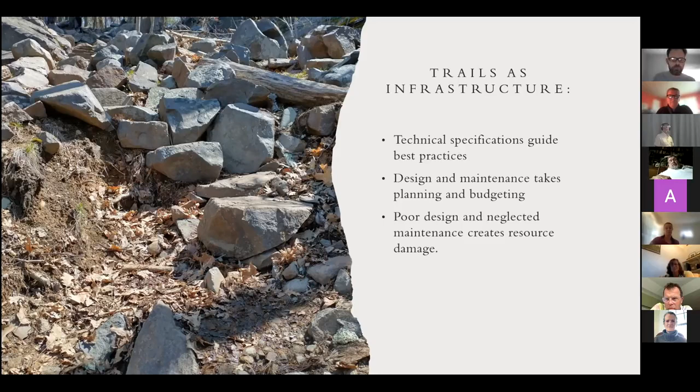But anyway, I'll move on to a discussion of what we'll cover in this presentation. I'll introduce the group to the concept of trail classification, just to drive home the point that there's a spectrum of trails and trail management decisions. And so not every trail needs the same treatment as the trail up to Nevada Falls at Yosemite, or maybe a popular trail up Mount Washington or Mount Monadnock.

The bulk of this presentation will really be about those sort of technical specifications. That's about how a trail interacts with the landscape, and that's about just some of the numbers and terminology that we use in this field to specify what we aim to do and the problems that we face. And we'll talk a little bit about construction and maintenance tasks. For this group, we'll go into specifics about what we're going to do Sunday and next week at Wright Woods.

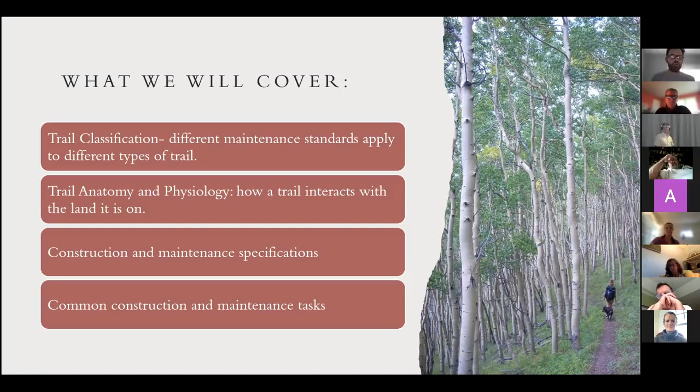So some objectives for this presentation. We'll talk about sustainable design principles. I hope that you'll leave this understanding what that means and how to identify and plan sustainable trails. And I hope that this knowledge is applicable. I hope that this isn't just theoretical. I hope that in your work throughout your communities, I give you at least something to think about and then further to use.

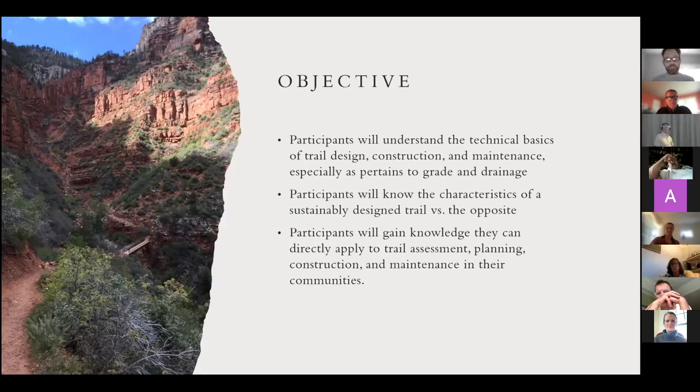So about trail classification, to get us started, this trail classification is U.S. Forest Service jargon, going from trail classification 1 to trail classification 5. Trail classification 5 would be like the bike path along the Charles River, for example. It's a trail, but it's a paved trail that is ready to accept a whole lot of use in a very front country environment.

Whereas, on the other end of the spectrum would be wilderness trails that require very little maintenance. And in fact, a light hand and little maintenance is part of the experience we would aim to facilitate on sort of a class 1 type trail.

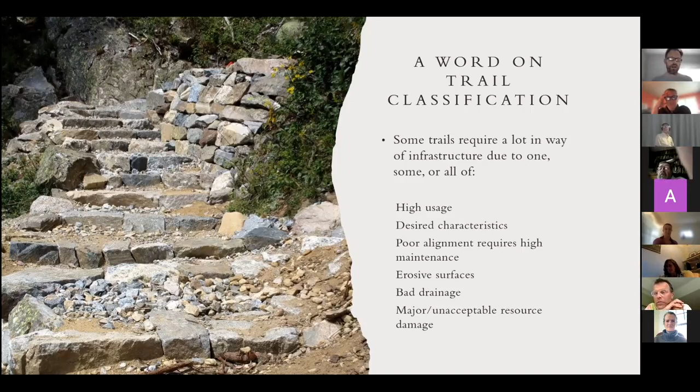But also the erosion was incredibly severe. The drainage was poor. So all of these criteria led us to management decisions to really have sort of a heavy hand. This was a very ambitious project. And so that's the spectrum of prescriptions that we could have in a trail work situation, and just to give you a sense of that spectrum, that it's not one size fits all.

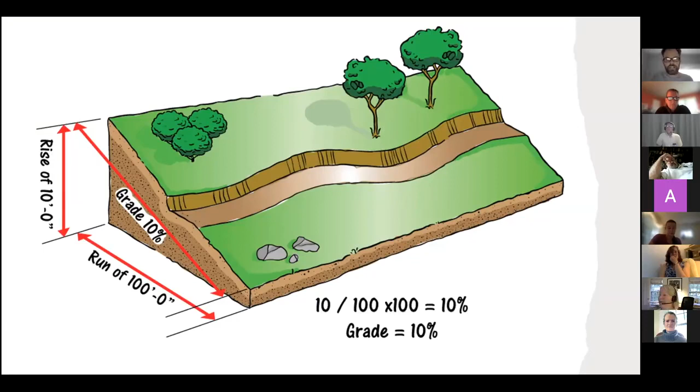So just so we know the terminology, this is how we calculate grade. It's very simply rise over run. Be advised not to get confused between degrees and percentage. People sometimes use them interchangeably, sometimes use them wrong. I try to only speak in terms of percentage, just to be clear. And so a 10% grade would be a rise of 10 feet over a run of 100 feet. In this diagram, that's the grade of the side slope. And then you're looking at a running grade of the trail that traverses the side slope moderately, scarcely gains any grade, probably not more than 2 to 3% if we're just estimating. And we do see at least one nice little drainage dip, grade reversal, in this illustration.

So here's the half rule. The half rule is just a rule of thumb. There has been in the last 10, 15 years some actual science about the relationship of running grade to the grade of the side slope. But this half rule has been around for a long time as a rule of thumb, and I think it's a good rule of thumb. It's simply that if the grade of the trail exceeds half the grade of the side slope it's traversing, then water will get on the trail and it won't get off. Whereas if we stay within 1/2 or less, we're setting ourselves up for the water to drain off the trail.

Some of the actual research that I've seen suggests it depends on the soil, it depends on the trail network, but especially in erosive soils, the half rule might not be enough in certain circumstances. And in certain circumstances, it's more than ample. But the key of the half rule to me, the eye-opening thing I've had in recent years, is that the half rule applies when your trail is only on a 10% slope. For me, it's instinctive to say, oh, this trail is really steep, so it must be bad. But if it's going over ground that is not steep, we have to take that into consideration. The trail has to be even less steep.

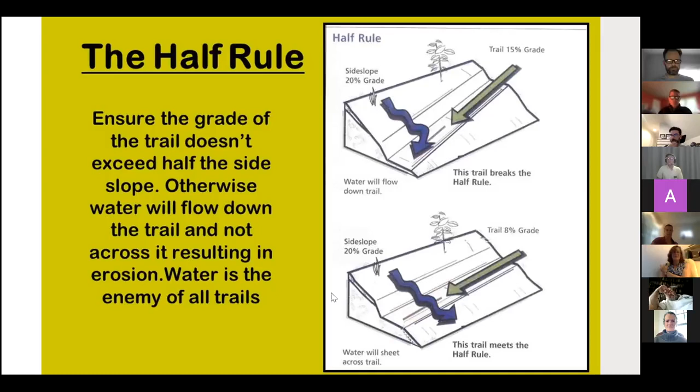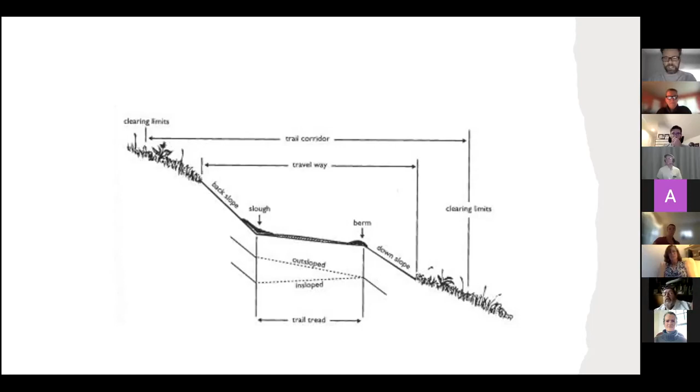The steeper the running grade, the steeper the outslope should be, which makes intuitive sense to me. Anyway, I don't want to get too bogged down in the technical stuff. There will be more slides and we'll continue to talk about this. So here's another slide that would demonstrate a 5% outslope.

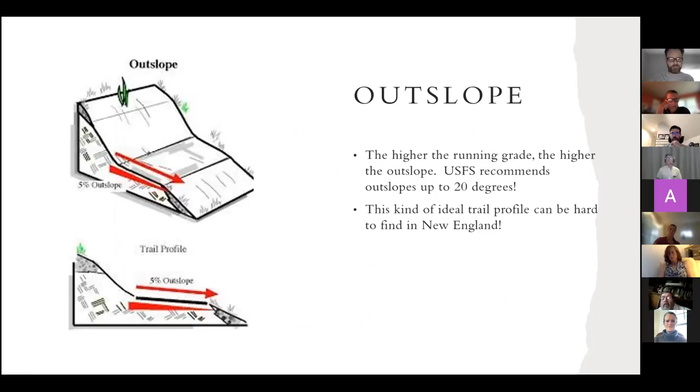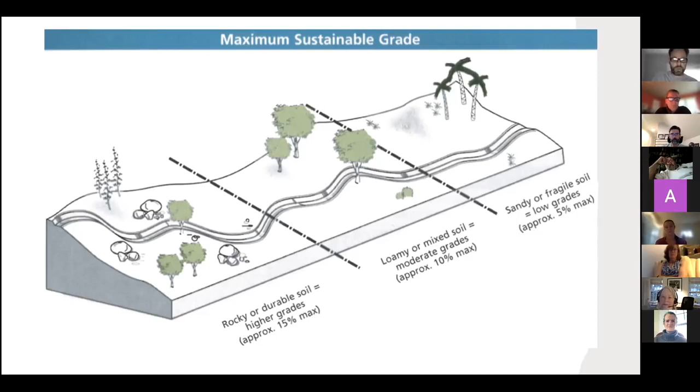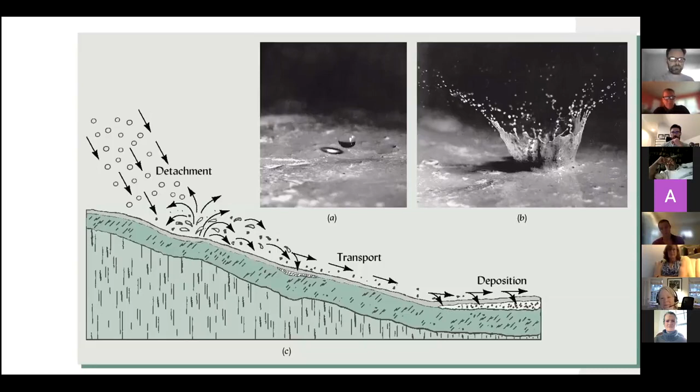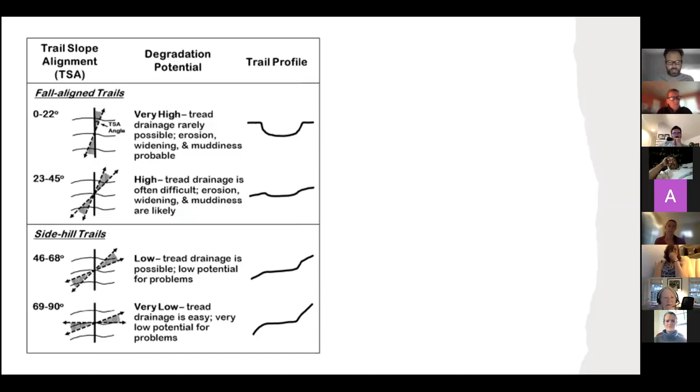Again, this is just the same principles over and over again. I do like the trail profile visual. I think it's helpful. And you can see the relationship of the running grade and the side slope grade to erosion problems. And you can see how that is cyclical. In the top fall line aligned trails, it only gets worse. And that's why it's unsustainable.

So here's a beautiful, this is actually that same Mount Baldy trail, just much lower in Bozeman, going up the M, if you've been. And so here we would observe a fairly erosion resistant soil, although it is a little dusty and sandy. In rainy conditions, it becomes like clay and slippery. So I think it is that kind of mixture, I would just guess.

But I like this slide for a couple of reasons. It traverses the side slope. And also there's a really clear example of a drainage, a grade reversal right here. They can be really subtle, especially when you have such an even soil and earth to work with. There's no rocks and roots there, which is crazy to us.

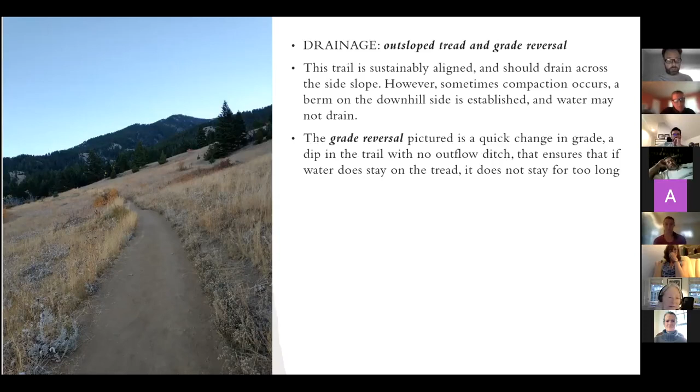So here's a picture from Grand Teton. This is demonstrating earthen berm drainage ditches or water bars. And this just demonstrates that this trail was clearly, to me, designed with some intention. Because it makes an effort to go across the side slope, but of course, when it comes and turns and switches back, it has to cross the fall line. And as it approaches and then crosses the fall line, the amount of drainage ditches increases.

Here in Teton, again, this up here is an excellent erosion resistant soil type. And we don't even need rock hardening or log hardening on the downhill side. Even when it gets steep, we can just rely on this soil to create earthen berms to divert the water off the trail. Really, this picture to me shows that as the trail gets steeper, the drainages get more frequent.

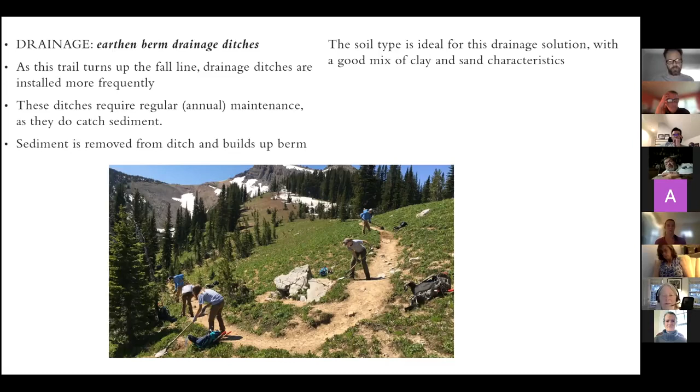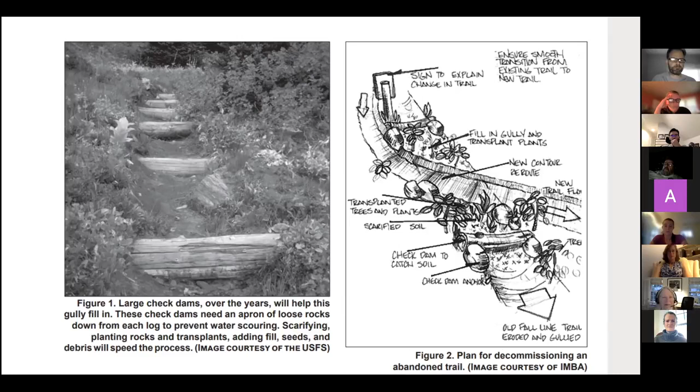I think at Wright Woods we might actually start finding some good soil sooner than in this particular photo, but I have gone back and visited this trail, and just the foot traffic alone kind of does burn out some of that organic material and leave you with a better tread than if you had tried to excavate down to that mineral soil, or worse, gone through the labor of trying to import it from somewhere else.

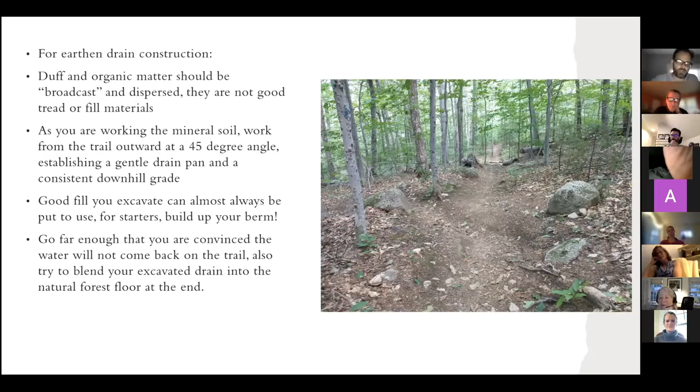Also, skiers need a little bit more maneuverability to make turns and whatnot, so we tend to go a little bit wider for the skier, as well as a horse has a wider profile. Out west, we account for pack stock being even wider. But generally, I talk about a 4x8 sheet of plywood. You should be able to hold a 4x8 sheet of plywood and have it not touch anything as you walk down a cleared corridor.

But you don't want that to be obvious. And that's because when you remove a branch, so if the plywood hits the branch, you grab the branch and then you follow it to wherever it begins, and you remove it wherever it begins. So you're not cutting it off strictly at the 4 feet, and you're not creating an artificial looking rectangle in the forest. You're tracing each piece of vegetation back to either the ground, cutting it flush, if it's a small tree or shrubbery, or if it's a branch, back to the tree trunk, or in some cases a prominent fork.

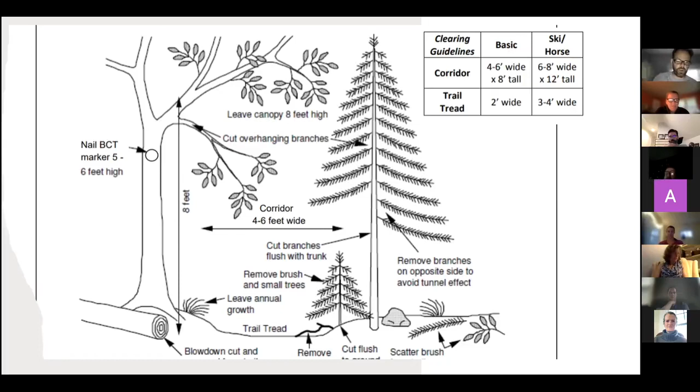And this is for small trees that are pictured here. Obviously, we wouldn't want to unnecessarily remove any mature trees. As trees get mature, their branches are up higher, so generally they clear the corridor a little bit easier. And so these pictures demonstrate what I'm talking about, that these branches that come into the corridor are removed at the base, pictured as a saw cut through where the branch meets the trunk.

And then as we are brushing out, as we're clearing the corridor, we'll take that vegetation, those small trees, and it will come in handy for brushing in the old trail. So brushing out is when we clear the corridor. Brushing in is when we take woody debris and try to cover up somewhere that we don't want people to hike. So we will brush out to brush in.

That's everything I wanted you guys to know in advance of our work next week. I'm really looking forward to it. Grateful for your audience, and I'm happy to take any questions.

Thank you, Matt. That was really good. There's a lot of information to take in. Yeah, like I said, there are lots of technical specifications that govern the decisions we make.